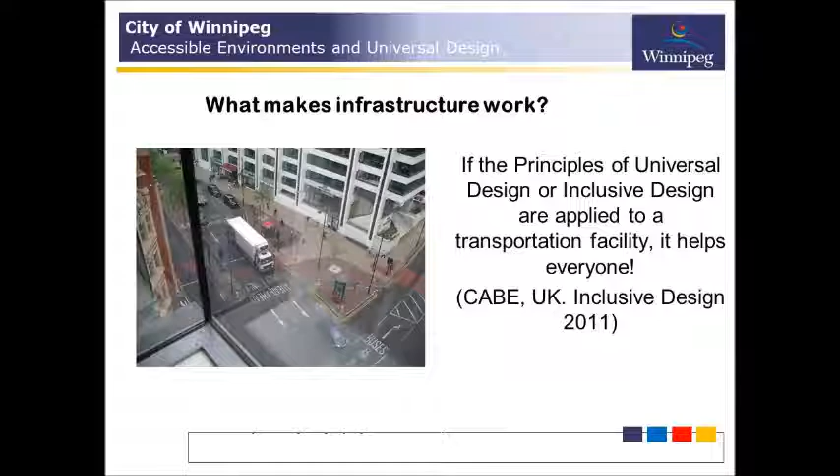The term active transportation is often misunderstood and at times misused. Active transportation, as you may know, is any mode of transportation that is human-powered, yet AT is often used to describe only cycling facilities. The City of Winnipeg is currently moving toward adopting a pedestrian cycling strategy that clarifies the need to have cycling and pedestrian modes separated where at all possible.

It also speaks to the need for adequate maintenance, including snow clearing. It defines the need to separate sidewalk snow clearing priorities from roadway snow clearing practices, so residential and bus routes become more important for people walking.

The type of pedestrian cycling facility has to be balanced with space and width requirements for the whole public right-of-way, including vehicle lanes, transit lanes, cycling facilities, and walking facilities. It also has to take into account underground and above-ground services, existing property lines, and developer needs for marketable lots. Grade separation possibilities is also a consideration, for example, at bridges and railway tracks.

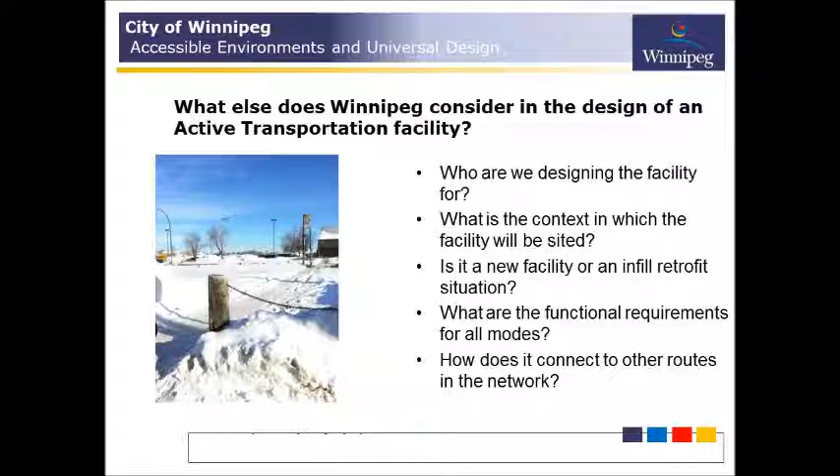Consideration for how people with disabilities navigate public rights-of-way is important for a few reasons. Persons with disabilities often have no choice but to walk or take the bus simply because driving is not an option for them. Many are not private vehicle owners and therefore rely on good, navigable public rights-of-way to get around.

Our population is aging and aging with disabilities. This population represents $311 billion in spending power in Canada alone, so this makes good business sense. The conservative estimate of 11.5 million people who are affected by disability in Canada will have the opportunity to contribute to the economy if they can get around and to and from places of business to obtain goods and services.

People with disabilities and older adults are living long and healthier lifestyles and do not care to stay at home and be isolated. They maintain their independence as long as possible by remaining active through walking.

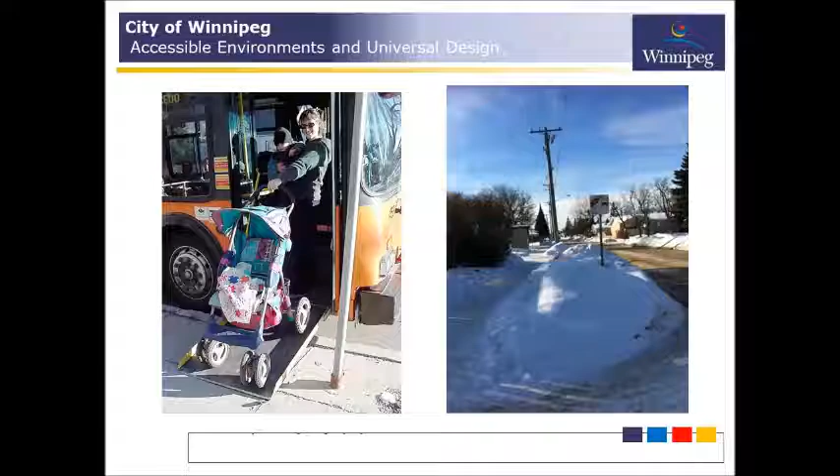Public transit increasingly becomes a reliable source of transportation as a person ages. But we need to remember that it is the whole trip that is important. A person has to get from their home to the bus stop and from the end of trip bus stop to their destination.

Spending the time consulting with pedestrians at the front end of a design may take longer for project managers, but produces a much more usable facility in the end. Gary Toth of the American Association of Retired Persons magazine says, 'People put the place back into streets,' and I really agree with that. The following are some things we've heard and learned directly from consulting with pedestrians, especially those with disabilities.

Safety features for our most vulnerable pedestrians can create better streets for all of us.

That might entail signals that count down an amount of time remaining to cross the street, or yellow detectable panels at curb ramps to inform you of an imminent pedestrian crossing at a vehicular intersection, or an audible chirp or cuckoo that tells a person who is blind that the don't walk signal has changed to a walk signal. Including features such as darkened textured bands to assist a person with low vision to maintain a straight path of travel without obstacles is very inclusive.

Features such as these mean more people will feel comfortable walking, which increases the number of people choosing that mode of transportation. Route choices will increase, width and paving patterns will be consistent and reliable for people who can't see.

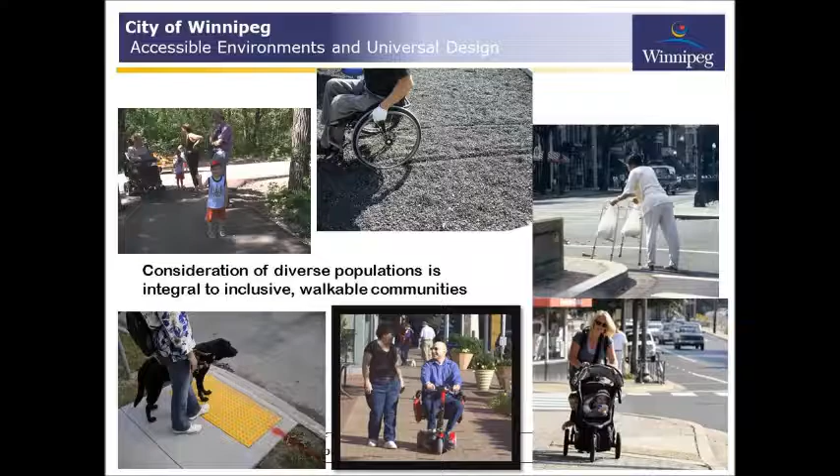Another consideration is the type of assistive device that is used to navigate the pedestrian realm.

In an international comparison of standards and research for the Rehabilitation, Engineering, and Assistive Technology Society of North America conference, Ed Steinfeld speaks about the anthropometric requirements needed for larger spaces for various wheeled mobility devices. Oftentimes, standards for wheelchairs are measured as a stationary piece of equipment. Truly, it's a dynamic width of the chair as a seated person maneuvers that provides a usable measurement.

Within new standards such as the City of Winnipeg Accessibility Design Standard, there's a recognition that equipment is changing. There are more people who use scooters, might require attendant services, or use walkers and wheelchairs of a bariatric size. It's imperative that that be taken into account when designing for the built environment.

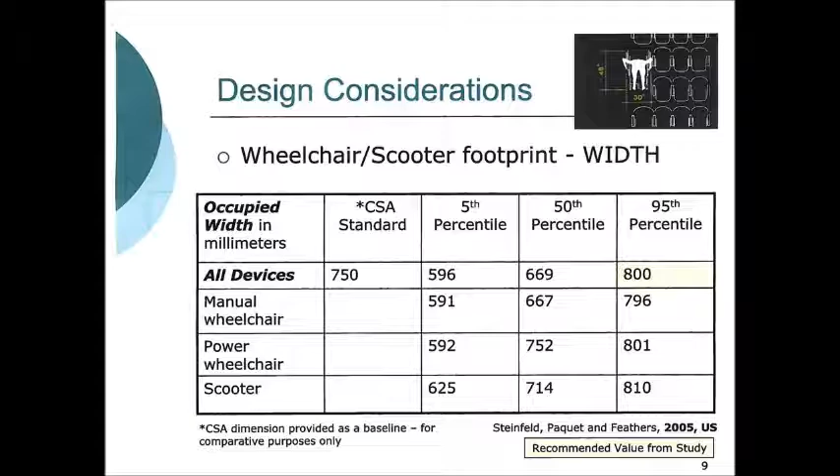The minimum standards of the National Building Code of Canada, for example, currently only design for less than 50% of the population who use a wheeled mobility device.

For example, a standard accessible washroom stall is 1,500 by 1,500 millimeters. That measurement is wall to wall and includes the space where the toilet encroaches. Most wheelchair users could not enter the washroom, close the door, and transfer onto the toilet in that small space.

Universal design tries to attain closer to the 95th percentile of people who use various mobility devices by requiring a 2440 by 2440 millimeter turning radius. That is a scooter size of turning.

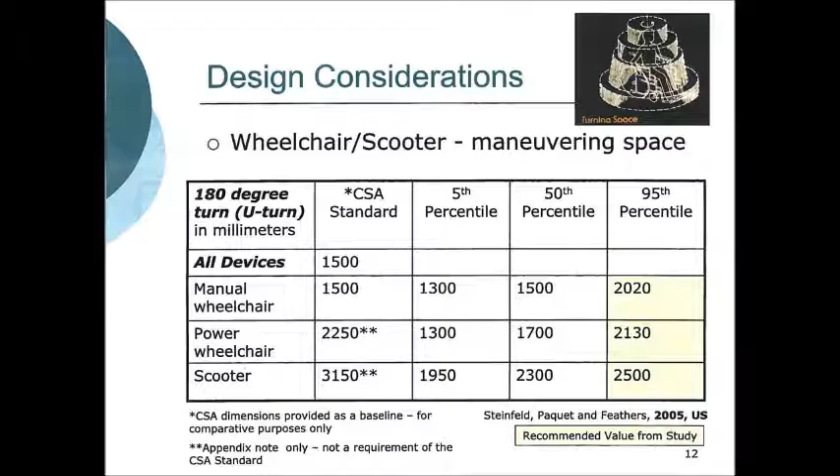Tying the end users back into the process as a design progresses and is completed is imperative in order to gain knowledge and process improvements. Seeing design decisions as interdependent, a way to learn new information that is inclusive and cooperative, helps us learn each other's perspectives and provide a much better environment for all.

Whether it is busing or walking to and from work every day, perhaps navigating streets with two small children in a carriage, maybe going shopping with an elderly parent, even waiting at a transit station with a child with a disability or accompanying a husband who's had a stroke to a medical appointment—these are not special situations. They are everyday occurrences that must be considered when building pedestrian spaces. Careful design and thoughtfulness in transportation planning and infrastructure can help take the stress out of these everyday experiences.

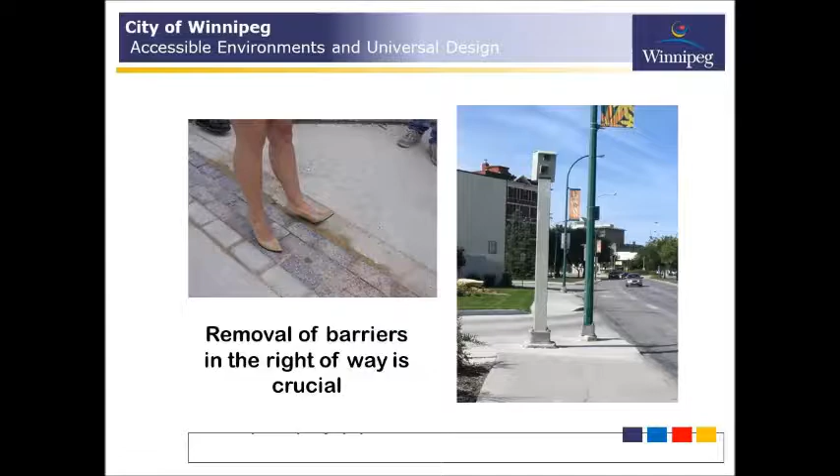In Winnipeg, multi-use pathways are quite commonly used as off-street facilities through greenway and park-like properties. It's more comfortable for slower pedestrian traffic and cyclists to share space in these circumstances, as a pathway can be built to a wider standard, generally 4 meters, because there are no bus stops along these off-street facilities. Pedestrians have less chance of interacting with cyclists along the way.

Winnipeg has begun to install some new on-street infrastructure to increase opportunities for mode choice. In doing so, we've learned some lessons. One is that slower moving people and faster moving people may not be compatible in the same pathway system. They may need some separation to feel comfortable and safe.

How about passenger side vehicle loading lifts that have to be deployed into the bike pathway along the parking stall? That needs to be considered. What about drivers who are wheelchair users loading or unloading from their driver's side doors? Adequate connections between the curb edge and the walkway must be designed into the facility so they can access facilities. What happens when cyclists sometimes shortcut between buses and the curb edge? Does that present an obstacle as a cane user exits a bus?

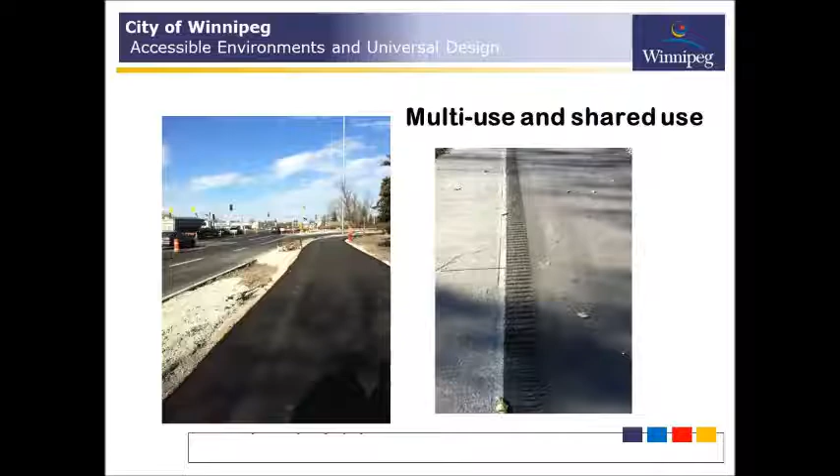Buffered bike lanes are relatively new in Winnipeg. You'll see some of them along Pembina Highway if you take a drive down there. Because these facilities allow bikes to bypass bus stops by going to the right of the bus platform, there is a high potential for pedestrian and cyclist interaction. In order to reduce the possibility for adverse interaction, features were added to the pavement to clarify which space is meant for bikes and which space is meant for pedestrians.

Transit users who are blind have told us that they find the bus stops difficult to locate on these wider facilities from the sidewalk. Raised, elongated yellow directional tile is being installed to bring the pedestrian who is a cane user to the head of the bus stop by the use of cane detection. Post-construction, we talked to people using these tiles and they felt they were helpful.

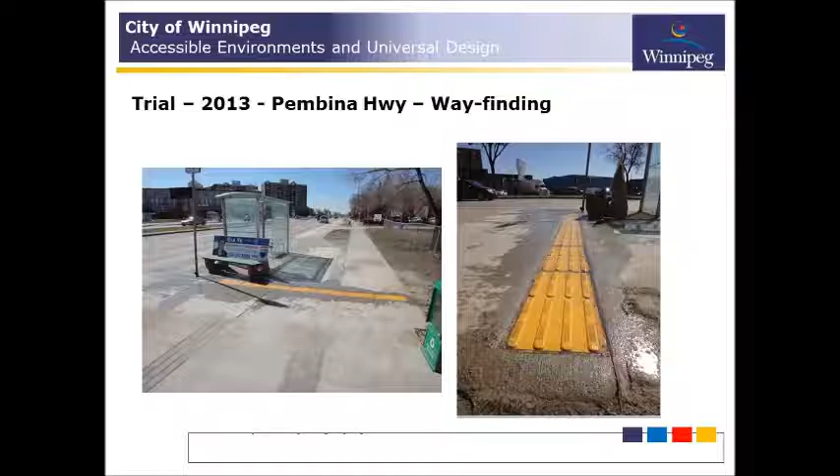It is now a matter of course that detectable warning surfaces are installed at any new or rehabilitated intersections in Winnipeg. Although various tests were performed with raked and grooved concrete, brick products in different colors, the community clearly requested that the city stay consistent and use yellow truncated dome materials only. The type of products that ended up being specified in the standard construction specifications for the city passed the test of winter snow clearing and longevity of color over time. Surface-mounted products did not pass the test of time and they were peeled off by the blades during snow removal activities.

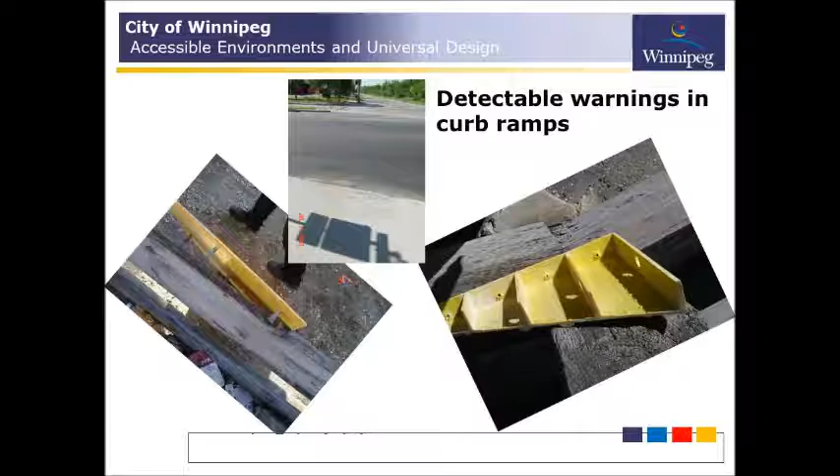A recent amendment to the Winnipeg zoning bylaw now requires that a clearly delineated pedestrian route that provides access from the public sidewalk to the front entrance of any building in a new development be included, excluding single and semi-detached homes.

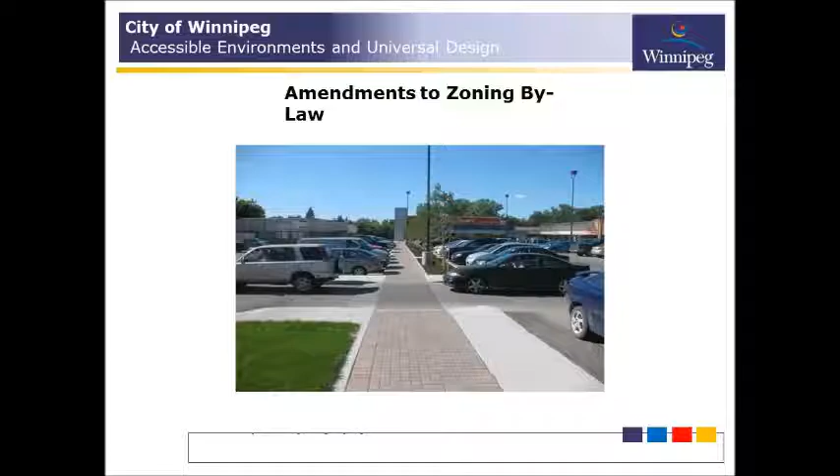We also now require a percentage of total parking stalls to not only be delineated as accessible, but also include a percentage that are van accessible with an access aisle.

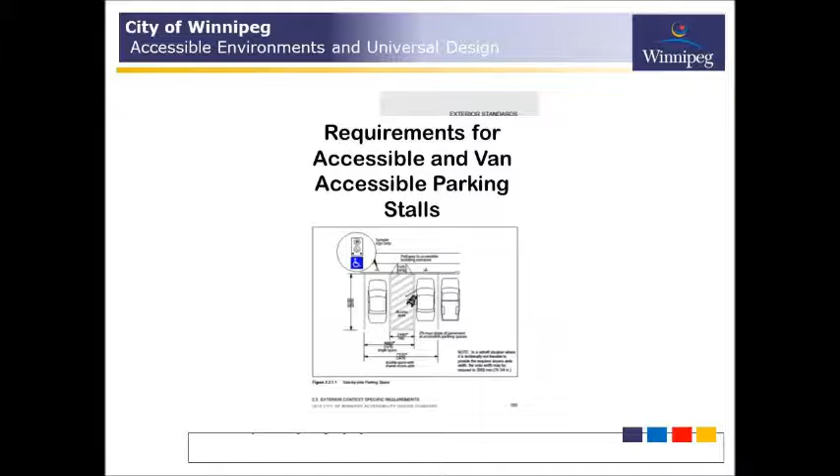The main point I want to make in this discussion is that Winnipeg has moved forward in its attempts to accommodate different mode choices, and in doing so has consulted with various users. This has resulted in the use of consistent tools to help people navigate their transportation options. In listening and learning from the most vulnerable right-of-way users, we have developed specifications and built some new facilities that have the potential to work well for everyone, but we continue to improve as we learn from each other.